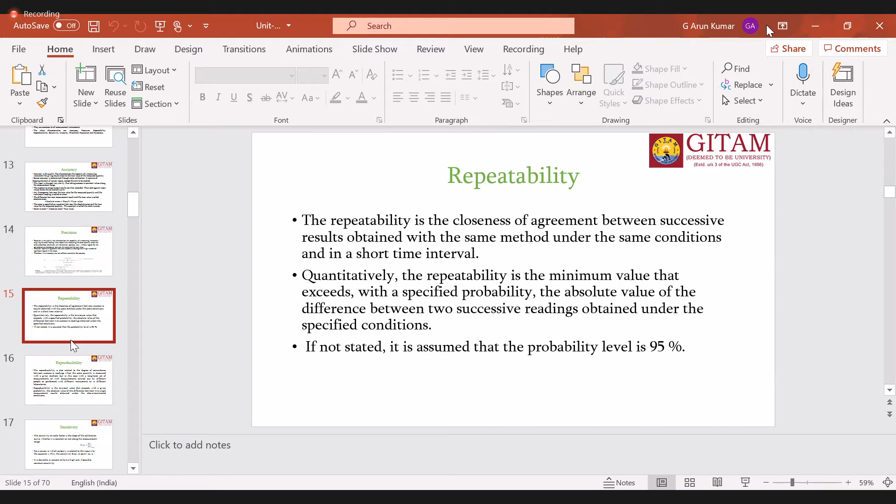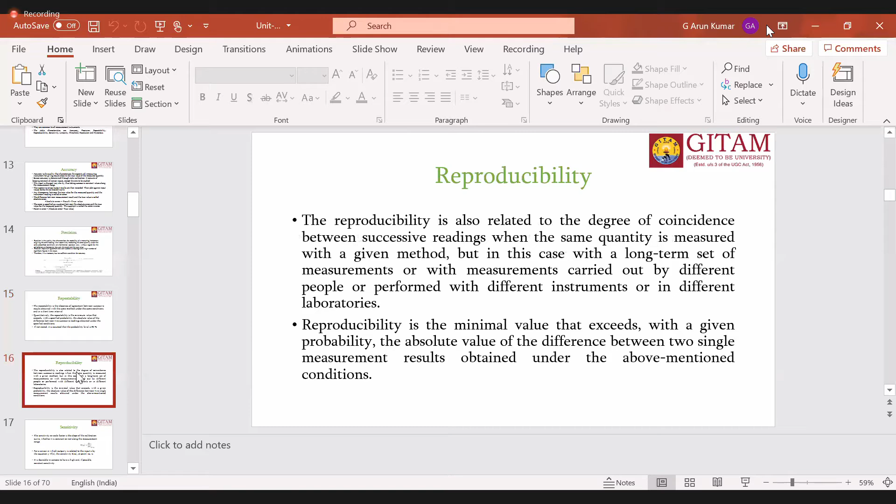Repeatability and reproducibility are similar, but repeatability is the ability of the system to produce the same value in the same continuous time periods. Reproducibility is the ability of the system to produce the same value for the same conditions and the same parameter at different time periods.

Sensitivity: ability of the system to give a response for the variation of the physical parameter. It is the speediness of the response in the measurement system.

Linearity describes the closeness between the calibration curve and a specified straight line. The dotted line represents the expected value, the expected response of the measurement system, while the dark line is the practical response curve.

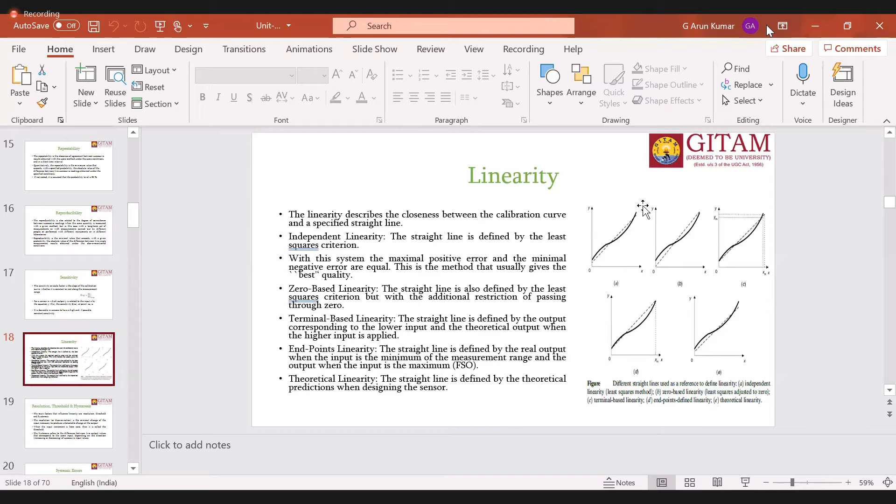Resolution and threshold are interlinked. Resolution is the minimum value that can be measured or detected by the measurement system. Threshold is the maximum value which cannot be detected by the device, which is less than the resolution.

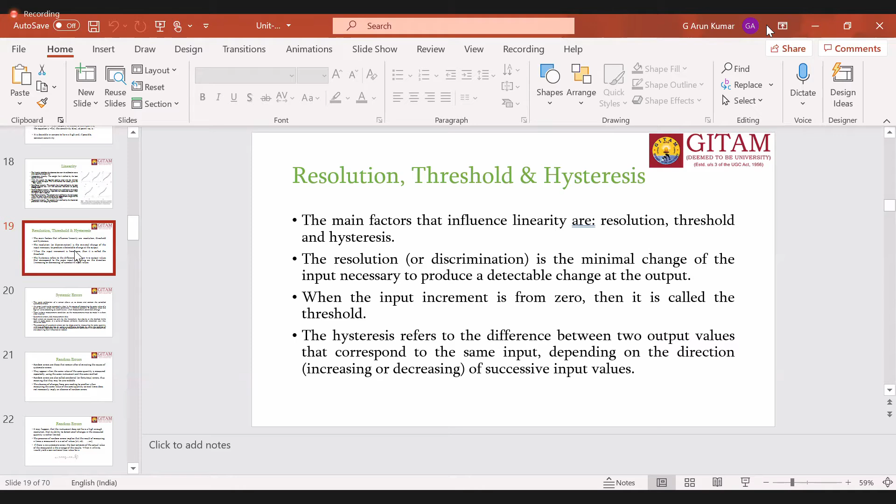Systematic errors can be detected and then rectified. But in random errors, we cannot detect the exact reason for the errors. We can eliminate the impact of random errors in our measurement calculations by taking average values and by using standard deviations.

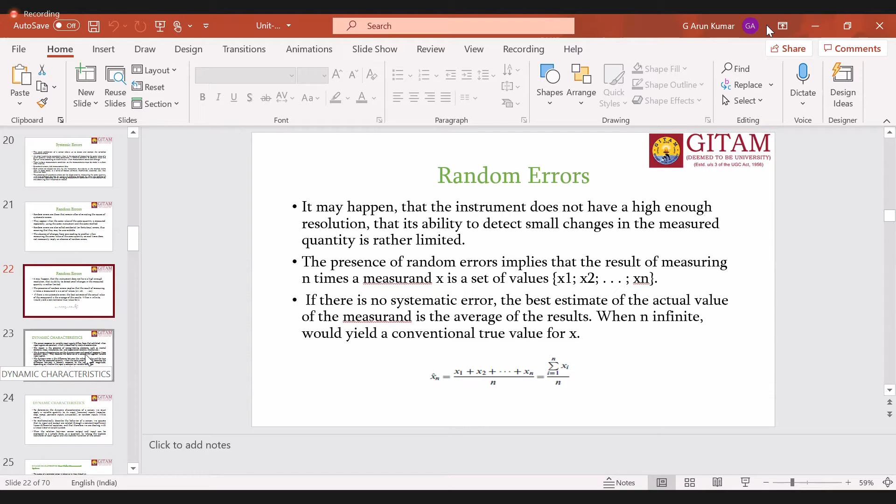Dynamic characteristics: we have taken three types of systems - zero order system, first order system, and second order system. And we have standard input signals like step signal, ramp signal, and sinusoidal signal. After applying those signals, we analyzed the first order, zero order, and second order systems.

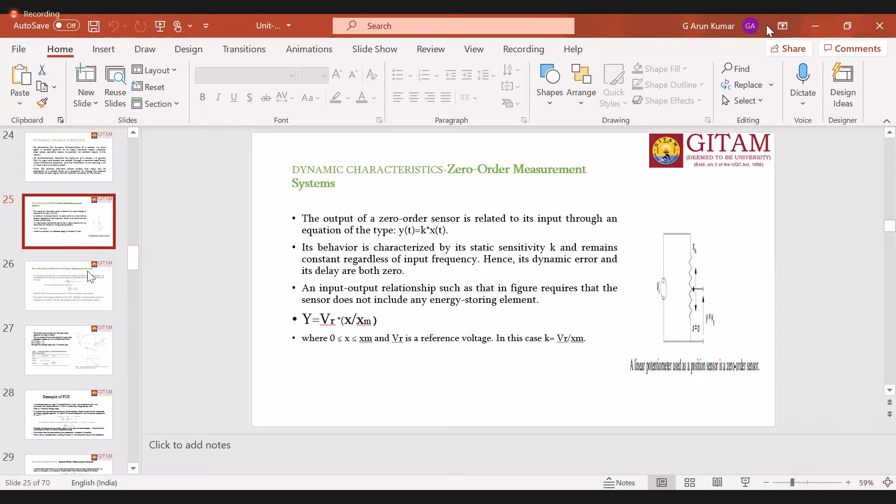In a zero order system, we do not have any energy storage devices, but in a first order system we have one energy storage device and one dissipating device. In a second order system, we have two energy storage devices and one energy dissipating device. In second order systems, the damping ratio is the main factor to get a response.

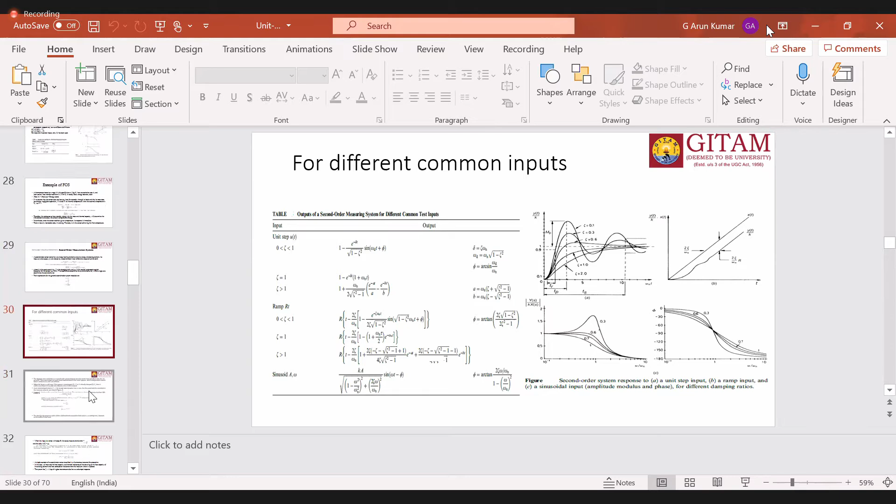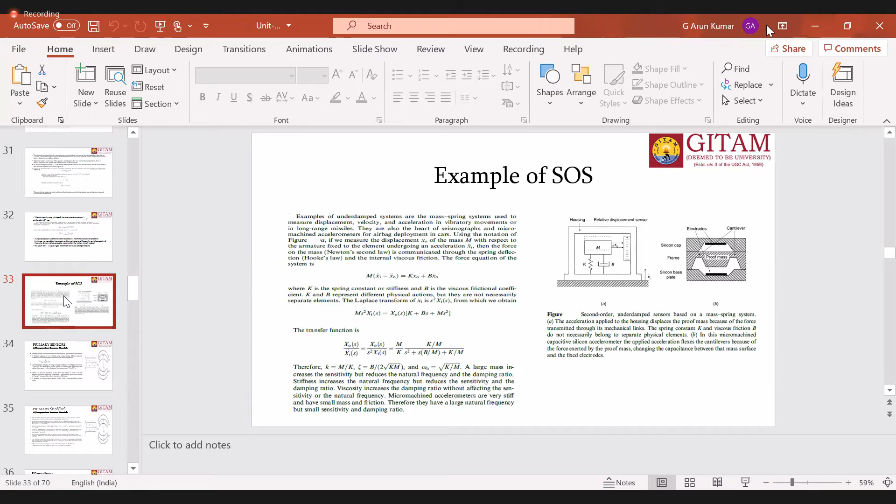We have seen practical examples for first order and second order systems, and discussed sensors. The bimetal sensor is a device to sense temperature, formed by two different metals welded together, which have two different temperature expansion coefficients.

Next we focused on pressure sensors: Bourdon tube, U-tube manometer, diaphragm, and capsules and bellows.

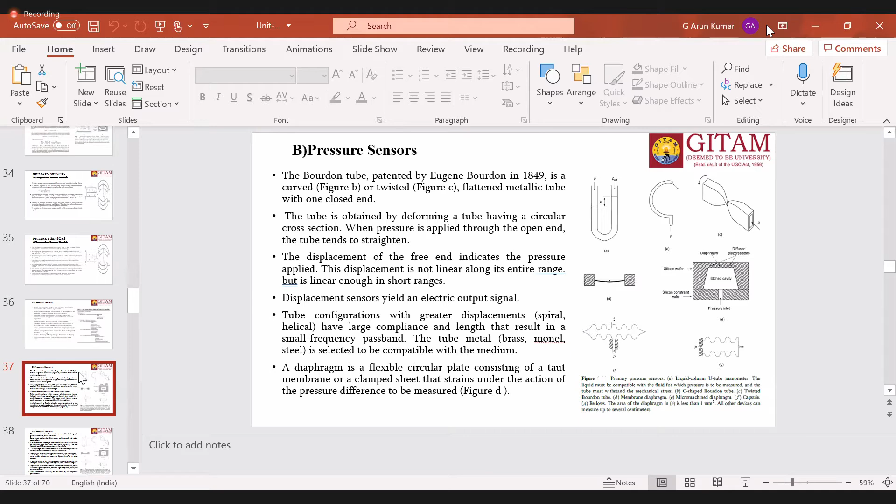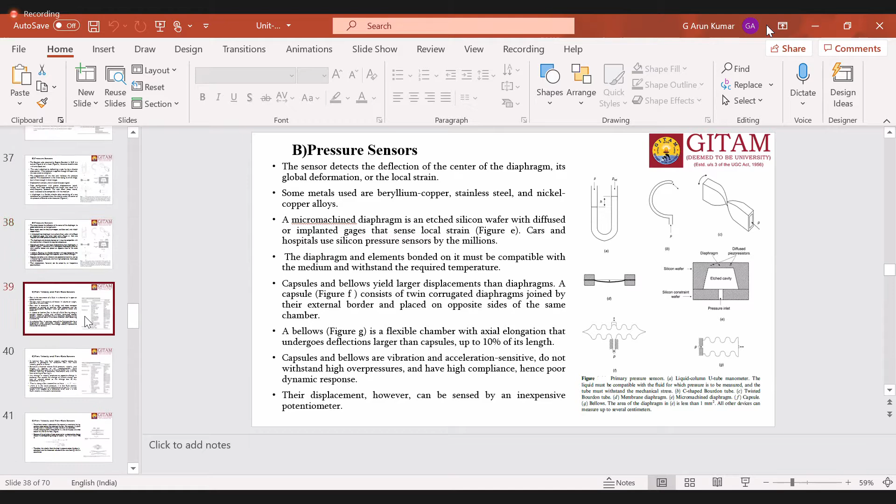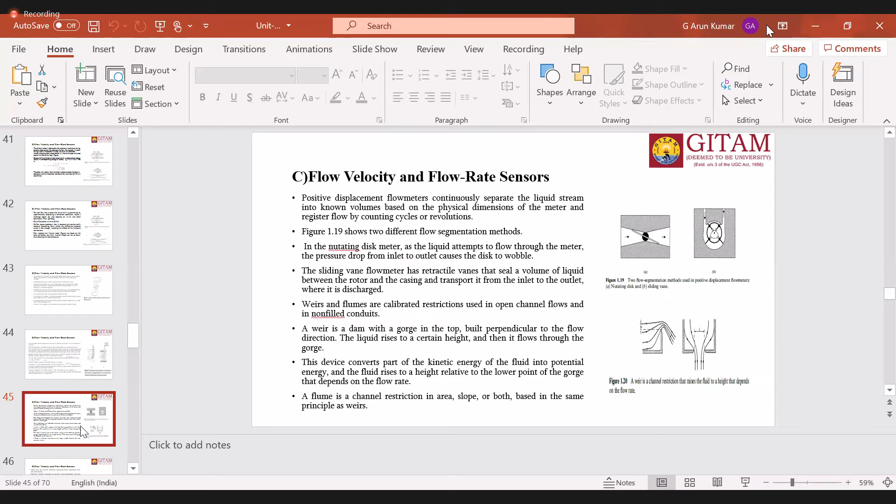We have focused on flow meters. These are the basic flow meters: venturi meter, orifice plate, flow nozzle, rotameter, pitot tube. And these are the massive flow meters: nutating disc, sliding vane, and weir channel.

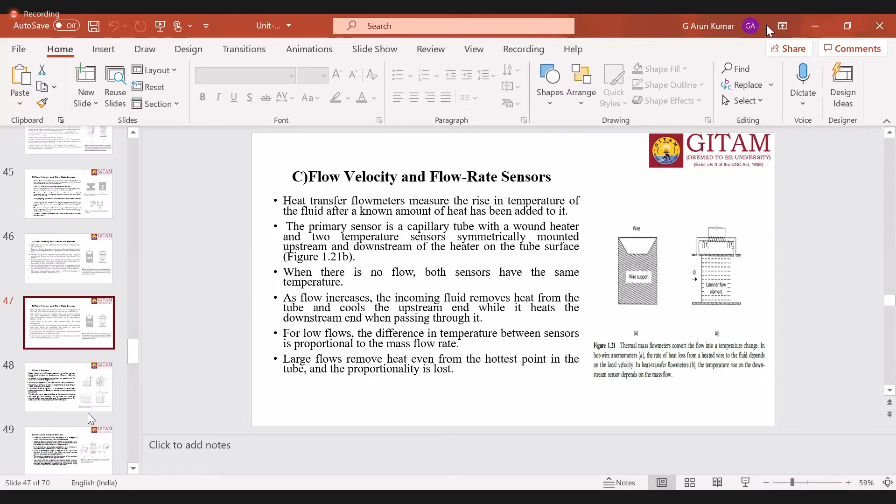We can use a hot wire anemometer also to estimate the flow rate. And next we focused on level sensors.

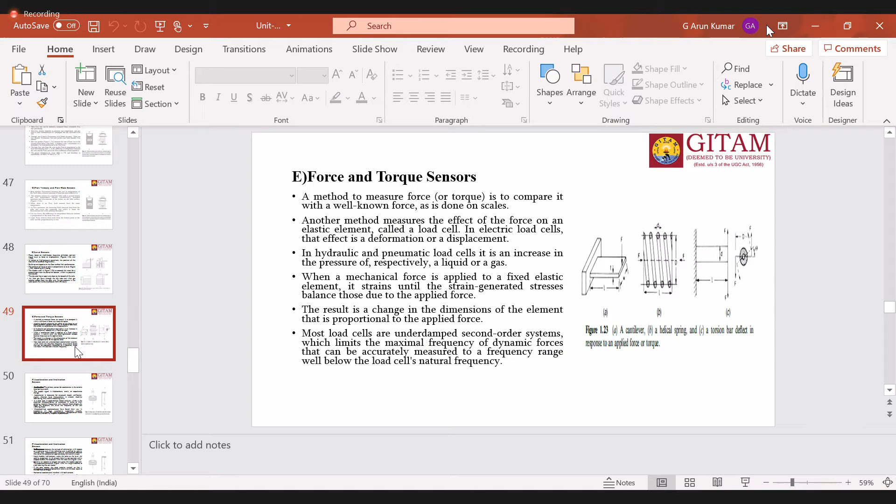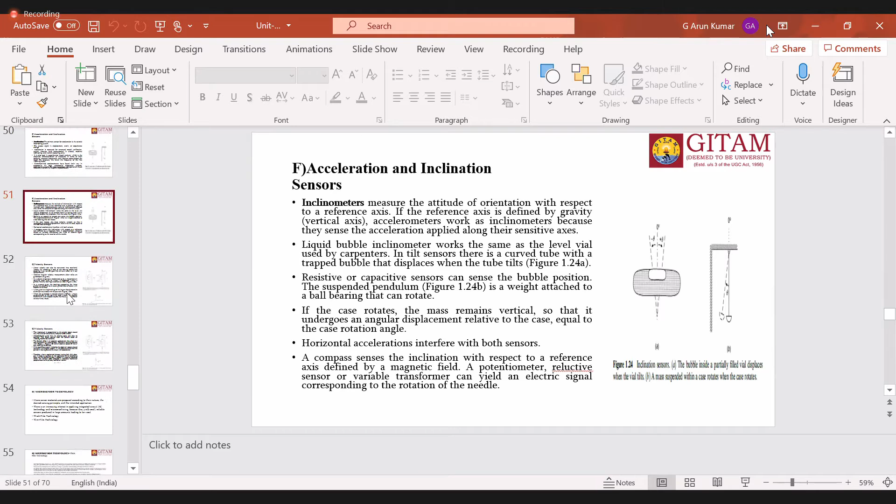To estimate force and torque, we have the cantilever beam, helical spring, and torsion bar. The torsion bar is for torque and the remaining two are for force. Acceleration and inclination sensors: the gyroscope is also used for inclination and acceleration sensing.

After that, we focused on MEMS and micro sensor technology also.

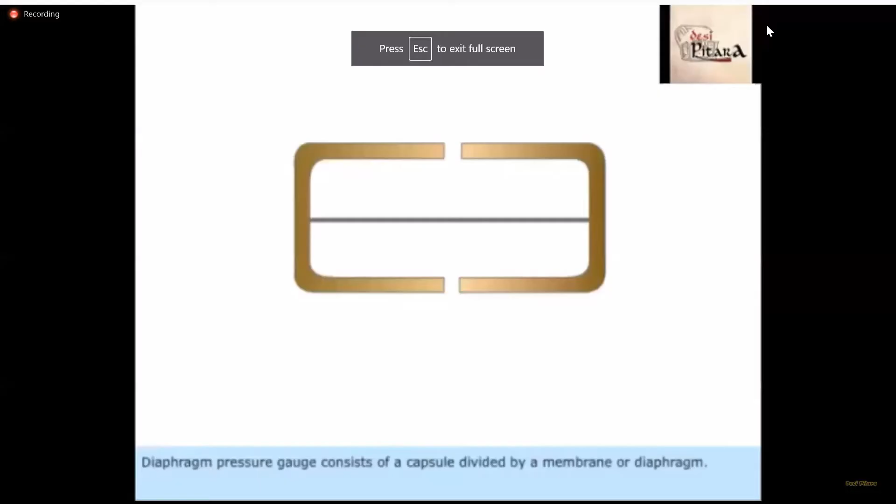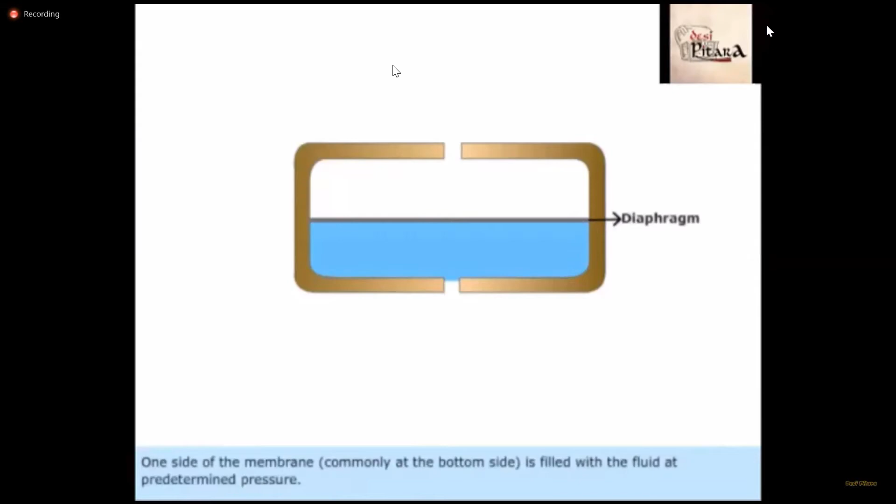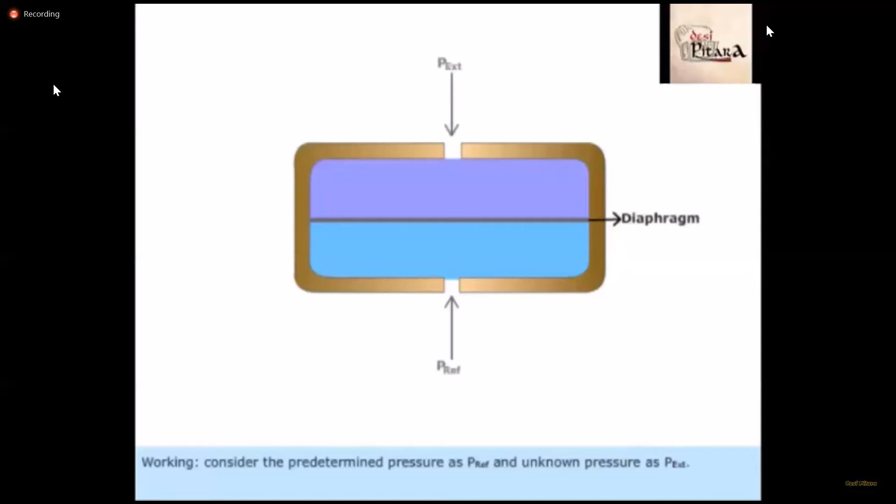We are going to learn about the membrane, which commonly at the bottom side is filled with fluid at predetermined pressure, and the other side is filled with the fluid or gas whose pressure is to be determined. Working: consider the predetermined pressure as P-REF and unknown pressure as P-EXT. The pressure difference, P equals P-EXT minus P-REF, gives mechanical deflection to the diaphragm.

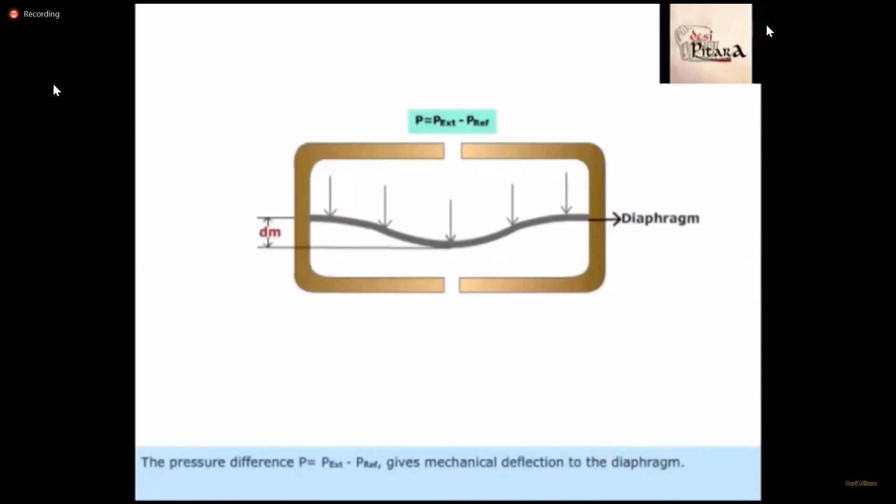Here, students, you can see it is an elastic type of material we are using as the diaphragm. Membrane deflection is proportional to the pressure applied. By measuring this membrane deflection, the unknown pressure can be calculated.

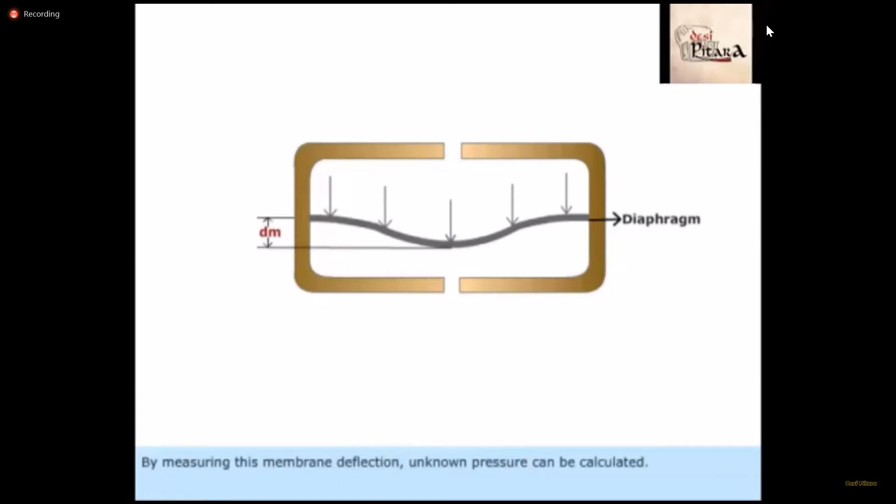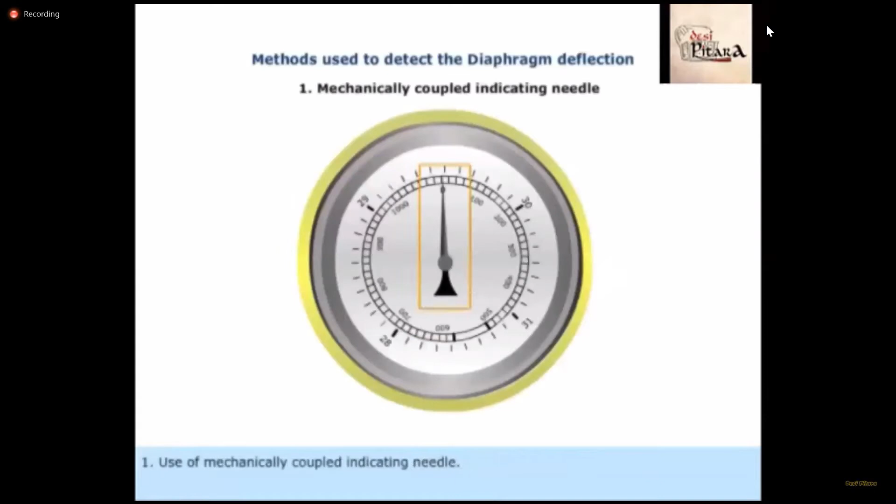There are a number of ways to measure this deflection: one, use of a mechanically coupled indicating needle; two, use of LVDT, the linear variable differential transducer.

When LVDT is used to find membrane deflection, the diaphragm is connected to the core of the LVDT. Students, LVDT is an electrical device, so here we have two windings.

If this core is at the middle, we will get zero output. If the core is near E2, we will get negative voltage. And if the core is near E1, we will get positive voltage. This is how the LVDT is designed - by observing the output, we can estimate the core position.

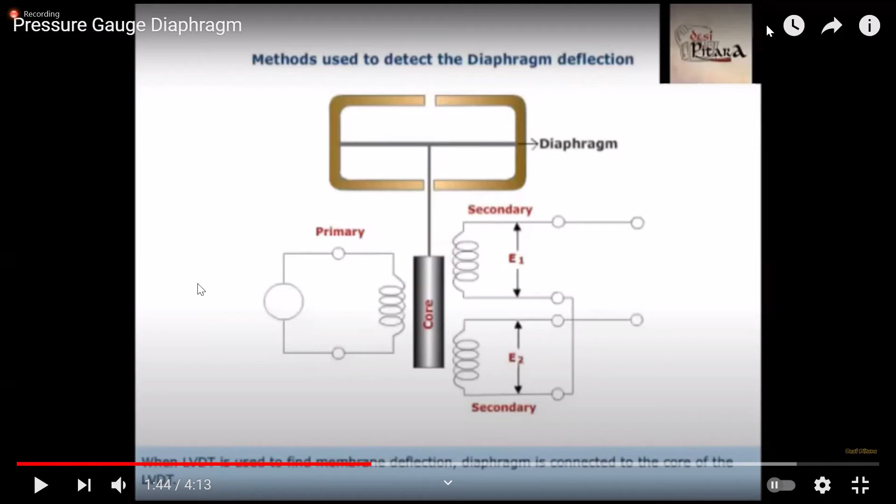As you know, in LVDT, there are two secondary coils connected in series opposition, and thus induced EMFs in those coils oppose each other. So the resultant EMF is zero at normal condition.

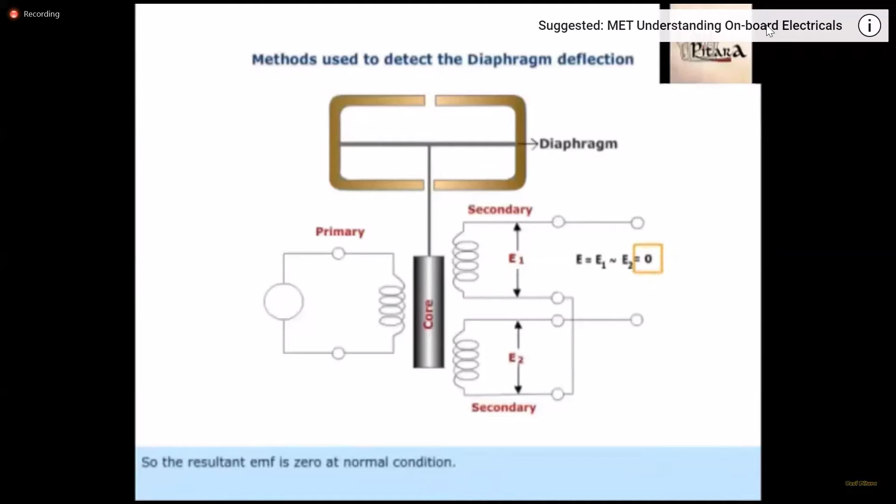When the core moves due to membrane deflection, the flux linking with one of the two secondary coils increases, which increases induced EMF in that coil. So there exists some resultant EMF. From that, we can determine deflection and thus pressure can be calculated.

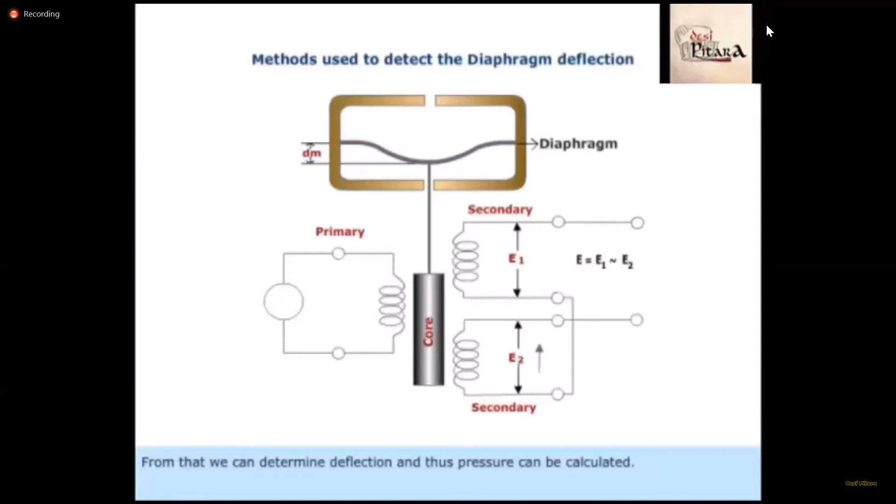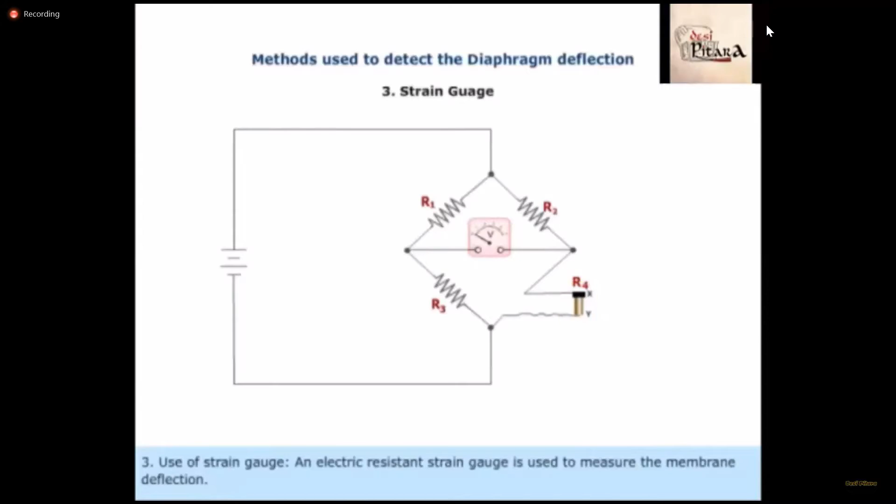3. Use of strain gauge. An electric resistance strain gauge is used to measure the membrane deflection. It has one long resistor strip XY connected to the diaphragm. At that point, X is fixed and Y is movable.

As the diaphragm bends, it stretches out the resistor from XY to XY dash. This stretching causes reduction of area of cross-section of the strip and increases its length. Hence, the resistance value of the strip increases. Refer formula R equals rho L divided by A.

The increase in resistance causes unbalance in the bridge, which shows indication in the voltmeter. By measuring this voltage value, gauge can calculate the amount of deflection or bend in the diaphragm. Using this displacement, unknown pressure can be determined.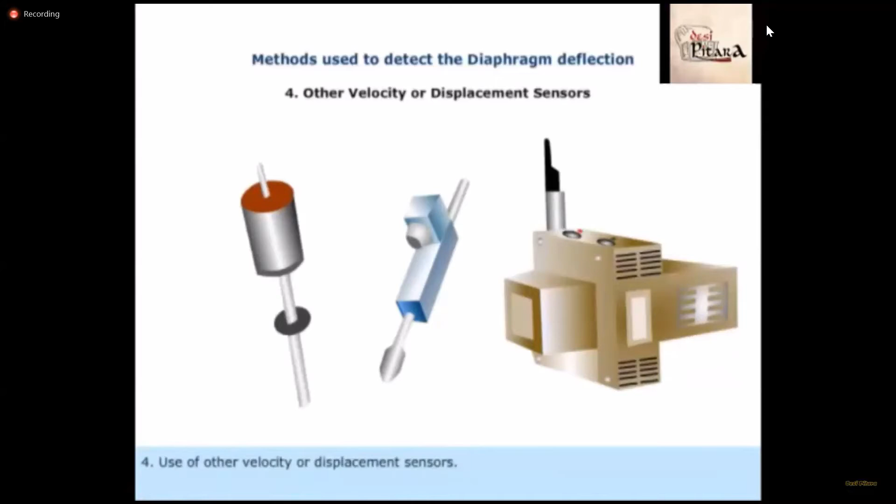4. Use of other velocity or displacement sensors. Thus, you have learned about diaphragm pressure gauge.

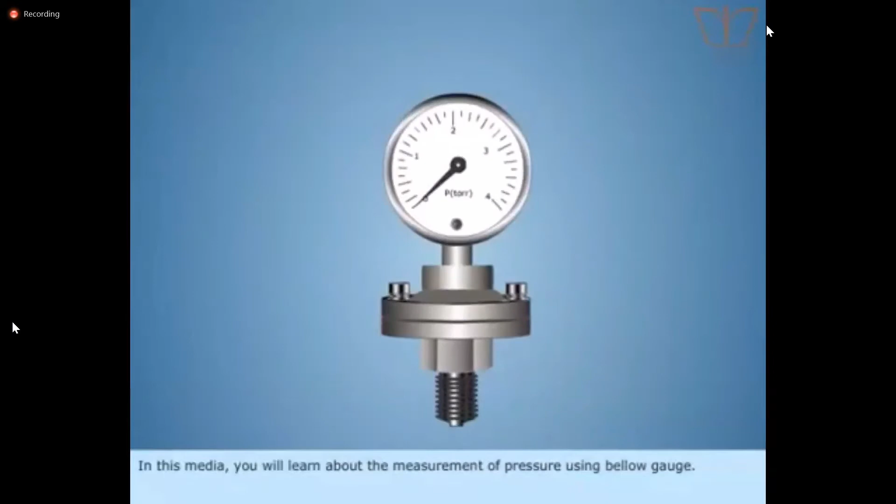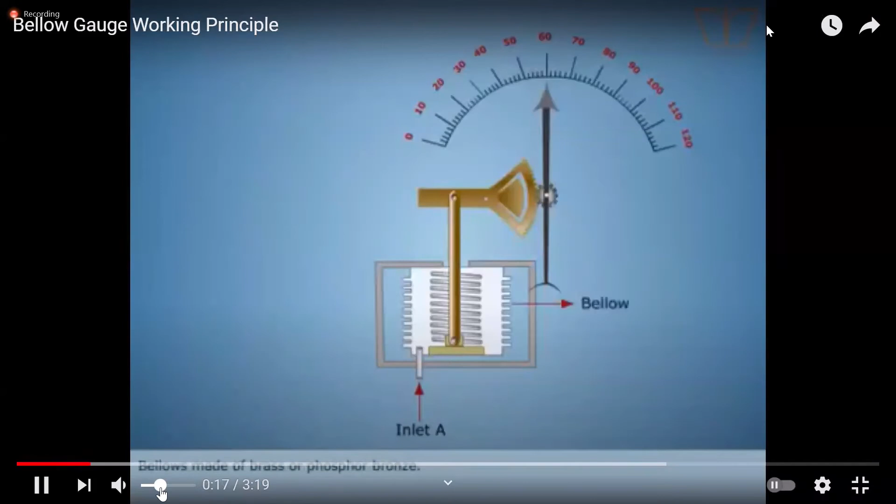The device consists of the following parts: Inlet A, where the unknown pressure is applied. Bellows made of brass or phosphor bronze. Spring arrangement. Connecting link. Sector and gear arrangement. Pointer needle. Graduated scale calibrated in terms of pressure. Outer case.

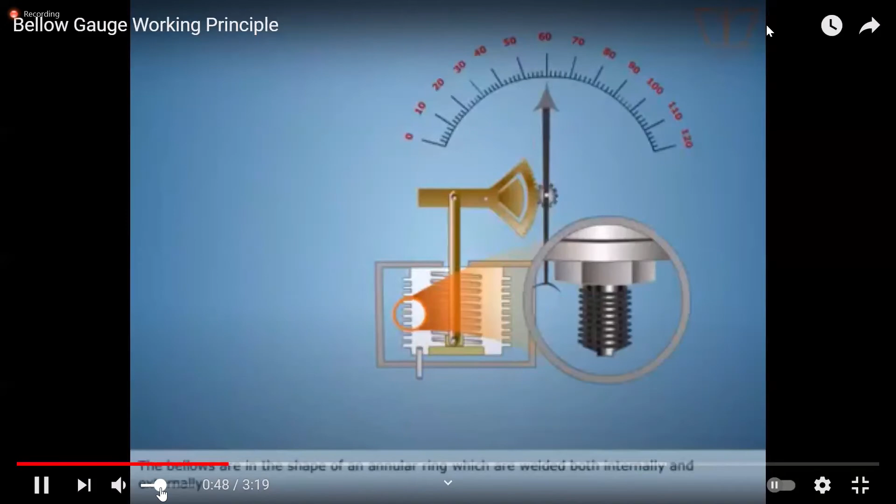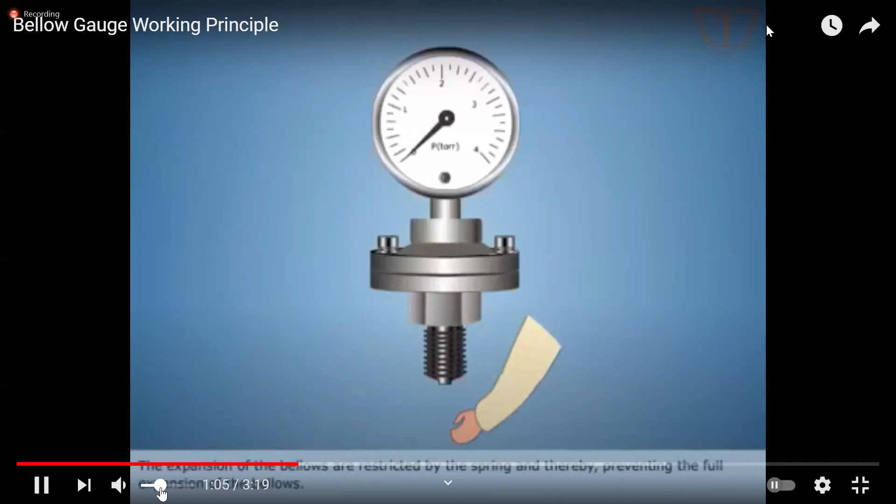The bellows are in the shape of an annular ring which are welded both internally and externally. The bellows contract or expand axially depending on the incoming pressures. The expansion of the bellows is restricted by the spring, thereby preventing the full expansion of the bellows. This mechanism will extend the life of the bellows and protects it. Bellow openings should be hermetically sealed such that there is no leakage of pressure.

Let us see the operating principle of the bellow gauge. The unknown pressure to be measured is applied at the inlet A. When the applied pressure is low or high, the bellows will squeeze or expand.

This moves the link up or down, which is connected to the sector arrangement. The sector arrangement will now react to the movement of the link and the pointer moves over the graduated scale. The readings on the graduated scale indicate the pressure value. When the pressure is removed from the case, then the link should come back to its original position.

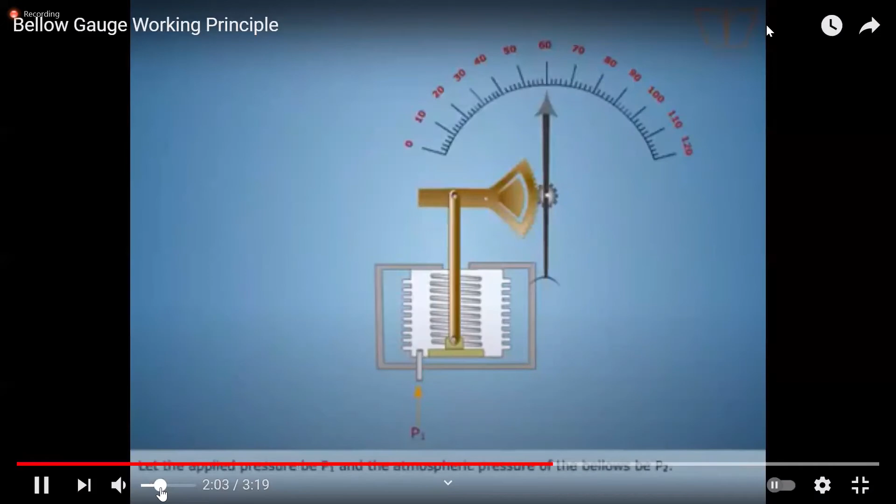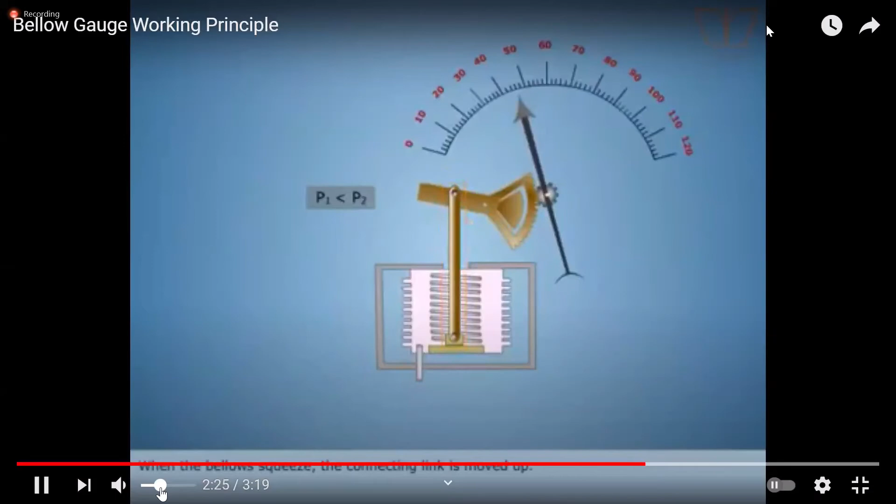Let the applied pressure be P1 and the atmospheric pressure of the bellows be P2. Case 1: When P1 is less than P2, the bellows will squeeze or contract. When the bellows squeeze, the connecting link is moved up. This pushes the sector down and the pointer moves over the graduated scale.

Case 2: When P1 is greater than P2, the bellows try to expand. When the bellows are expanded, the connecting link is moved down. This pushes the sector arrangement up and the pointer moves over the graduated scale.

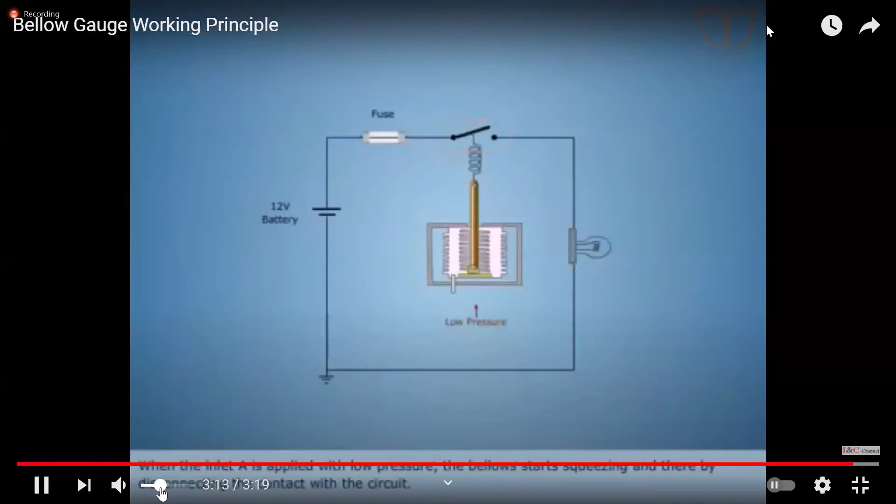Bellow gauge can also be used as an electrical switch. Bellow gauge is connected to any electrical circuit. When inlet A is applied with low pressure, the bellows start squeezing, thereby disconnecting the contact with the circuit. Thus, you have learnt about the bellow gauge.

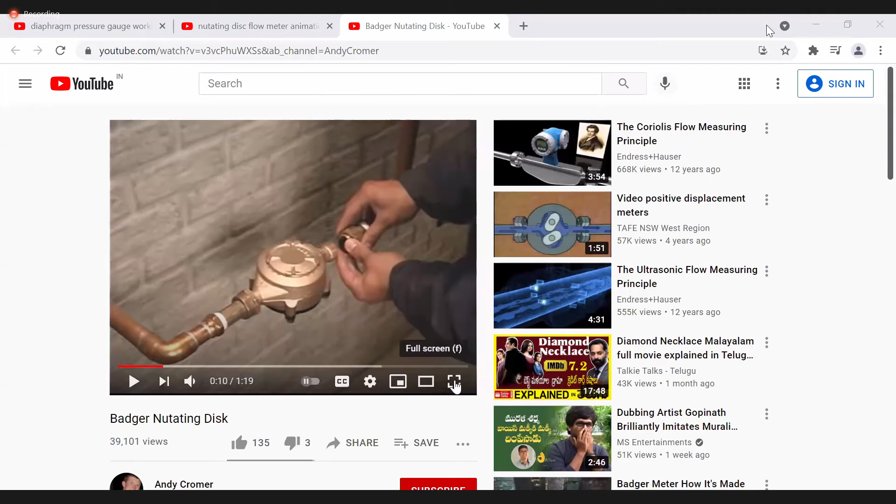Students, in this animation, we will understand the working of the nutating disk flow meter. Water flows directly into the meter housing. The water first flows through the meter's internal strainer before it enters the measuring chamber. The strainer protects the measuring chamber from damage due to debris in the water.

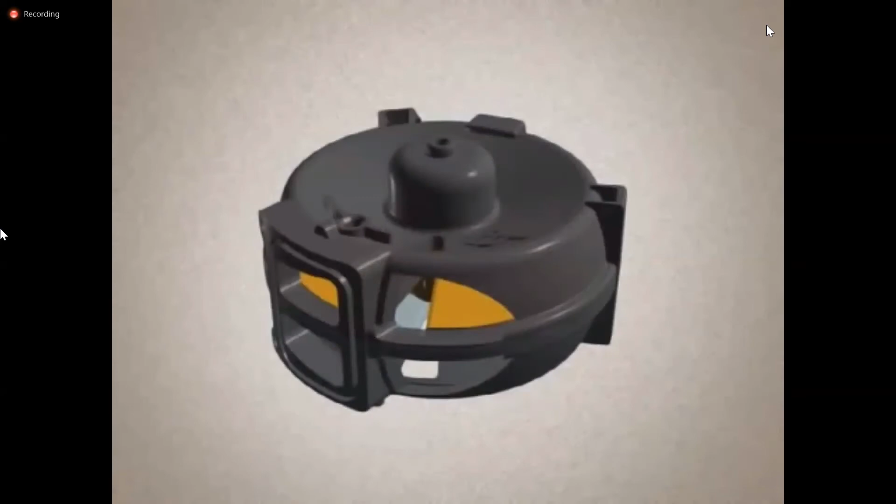Inside the chamber assembly is a movable disc that's located on a spherical ball guided by a thrust roller. As the water flows into the measuring chamber, it causes the disc to nutate, a motion similar to a coin dropped on a table. Notice that the disc does not rotate, but rather wobbles on its axis. Therefore, the space formed between the disc and the chamber wall has a constant volume as it moves around the chamber. The water in the chamber is a fixed volume, or displacement. That's why a disc meter is called a positive displacement meter.

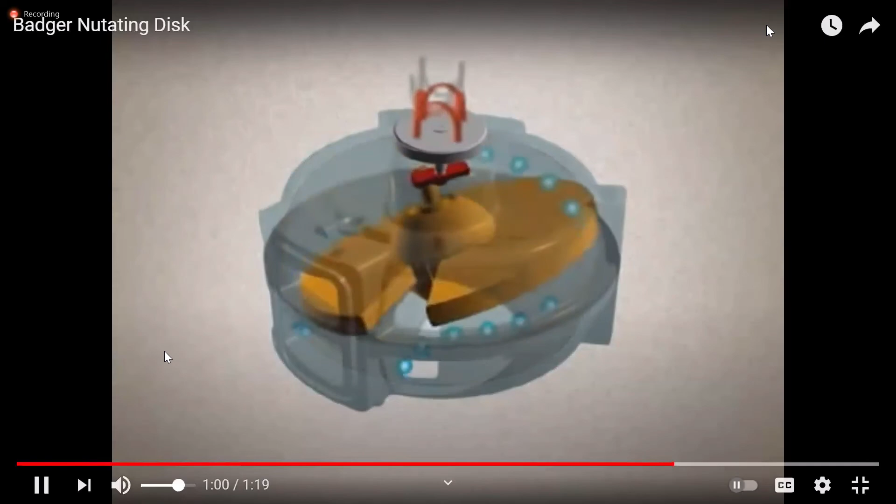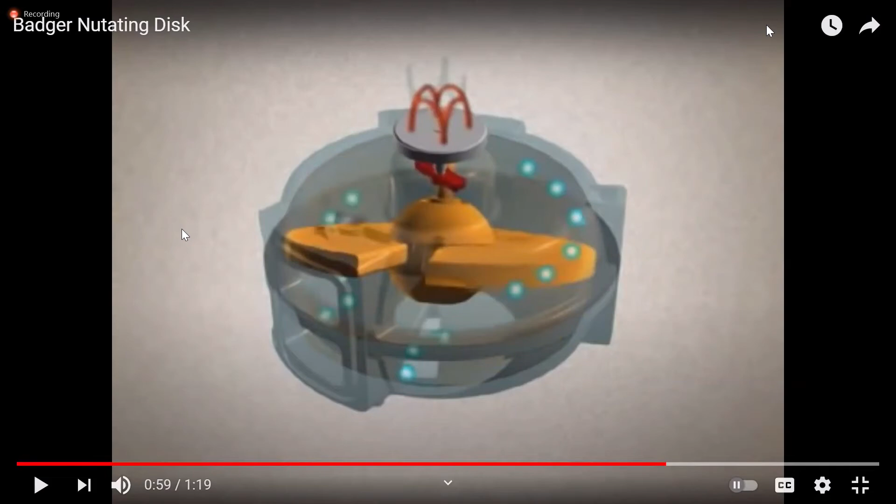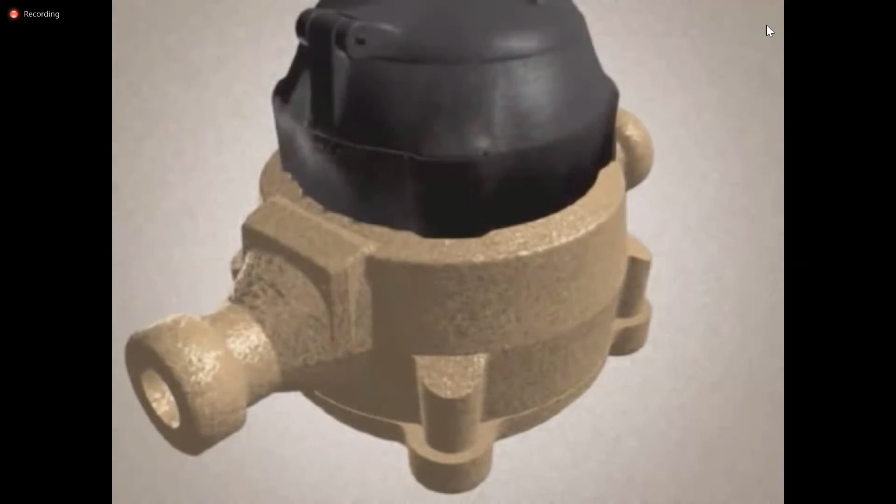The smooth motion of the disc also eliminates the annoying noise produced by some other types of positive displacement meters. As this happens, the nutating disc translates its movement through a magnetic coupling to the register. The water then leaves through the outlet port of the chamber assembly.

Students, we have discussed other positive displacement meter, that is sliding vane. Now we can see that animation.

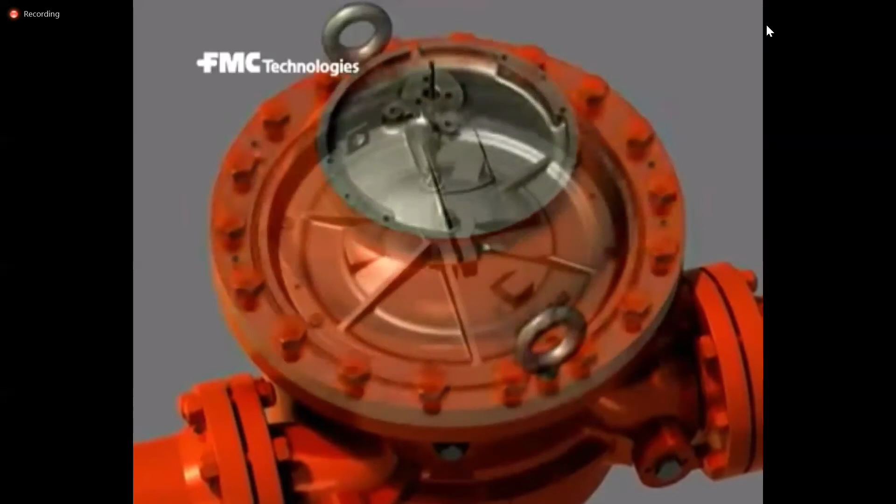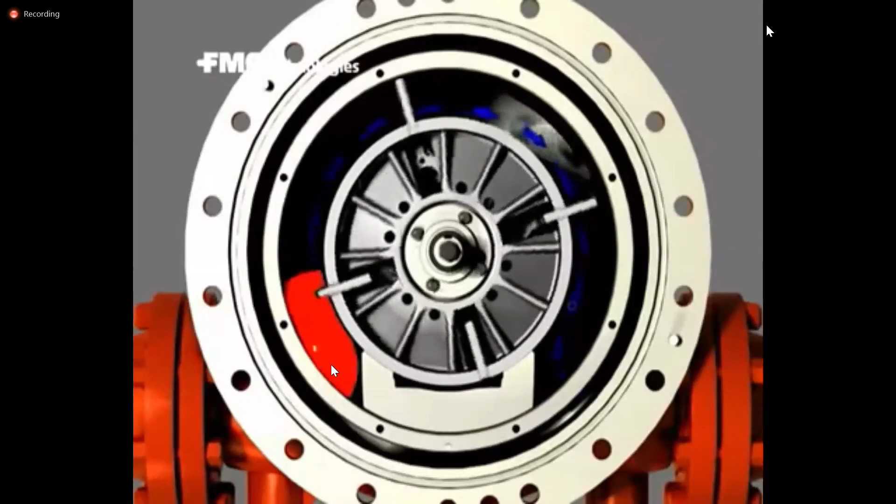The fluid flow enters the meter on the left side. The block at the bottom of the meter separates. See here, this is the inlet and we are allowing fluid. That fluid is rotating the disc. The inlet is separated from the outlet, and here we have the outlet. It will rotate the disc and it will come out from the pipe. This prevents the fluid from bypassing the measuring chamber. Instead, it is channeled around the rotor into the measurement section.

The fluid is continually separated into discrete segments in the measurement section. The path of a single fluid segment is highlighted in red. As the measured fluid segment is discharged from the meter on the right, the rotor cover is removed, and we see the blades rotating around the shaft. The blades are extended and retracted as the blade rollers follow the profile of the stationary cam.

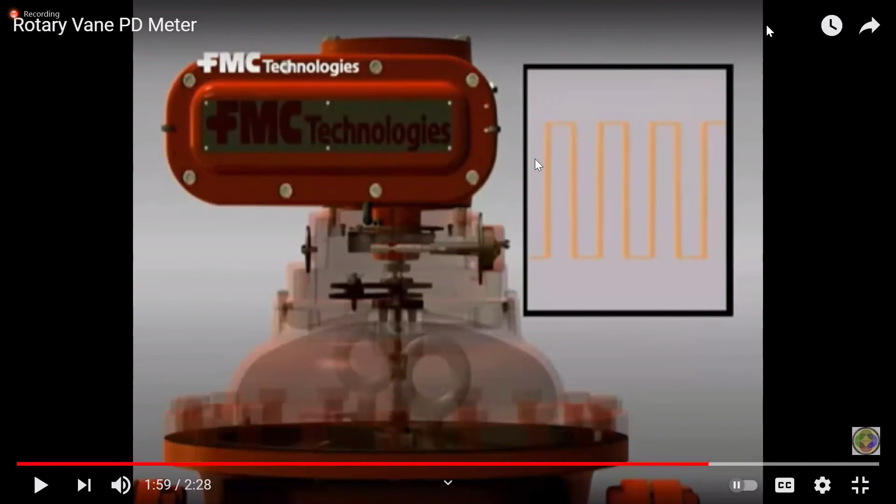The fluid flow drives the rotation of the rotor and blade assembly in a continuous sequence. The rotor assembly is connected to the meter output shaft by a gear coupling. Each revolution of the output shaft, therefore, represents a precise volume that has passed through the meter. The external gear train changes the metered volume into the preferred measurement unit, such as gallons, barrels, or liters. The output shaft can be directly coupled to a mechanical calibrator and counter. And these are the rotations of the disc.

Another important flow meter, students, hot wire anemometer.

This video will discuss the working of hot wire anemometer. First we see, students, in this pipe we have arranged a hot wire. This red color is hot wire, and this is connected to an electrical circuit.

This circuit is called a bridge. Here the principle is the 4 resistors should have the same value. Then output will be 0. If any one of the resistors has a different resistance value, we will get an output. By observing that output, we can estimate the variation of the resistance in this hot wire.

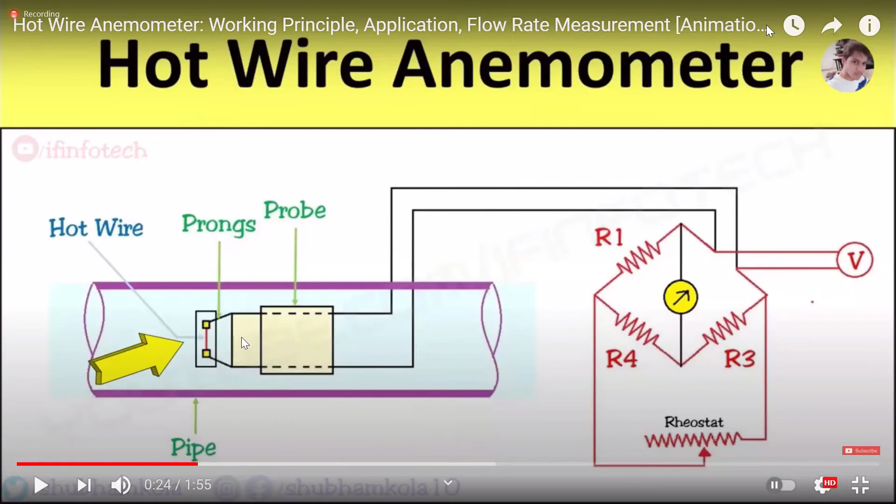Here, before allowing the flow, this hot wire has some resistance, which is equal to these 3. When you allow the liquid, because of that liquid flow, the hot wire will lose its temperature. And we have to keep on maintaining that resistance by giving the temperature. Here is the working principle: when fluid flows over a heated surface, heat is transferred from the surface. Depending on the flow rate, the hot wire will lose its temperature. So this is the construction of hot wire anemometer.

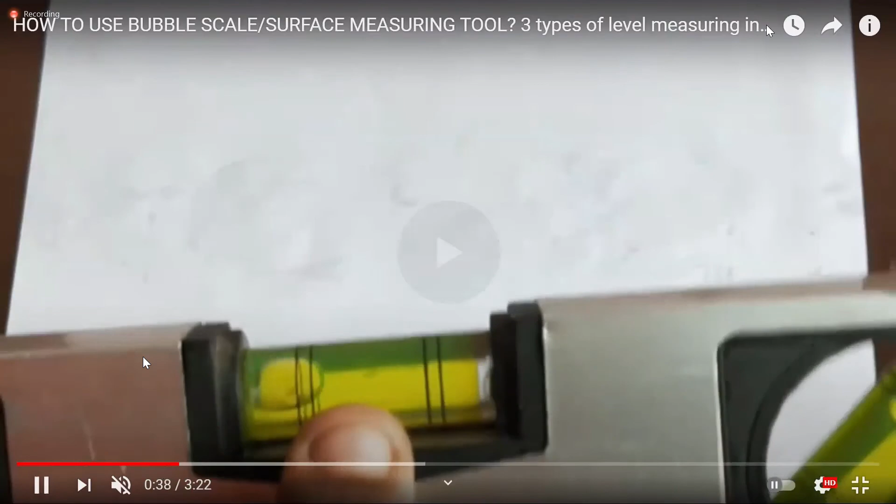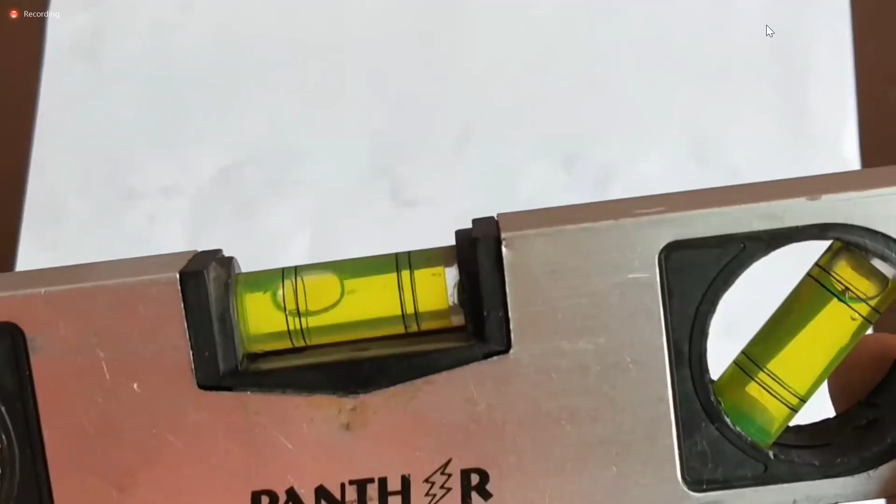See students, if we change the position of the scale, the bubble will take different positions. Here you can clearly observe. The bubble will take different positions in that small cube. So here they have arranged 3 small cubes with the bubble.

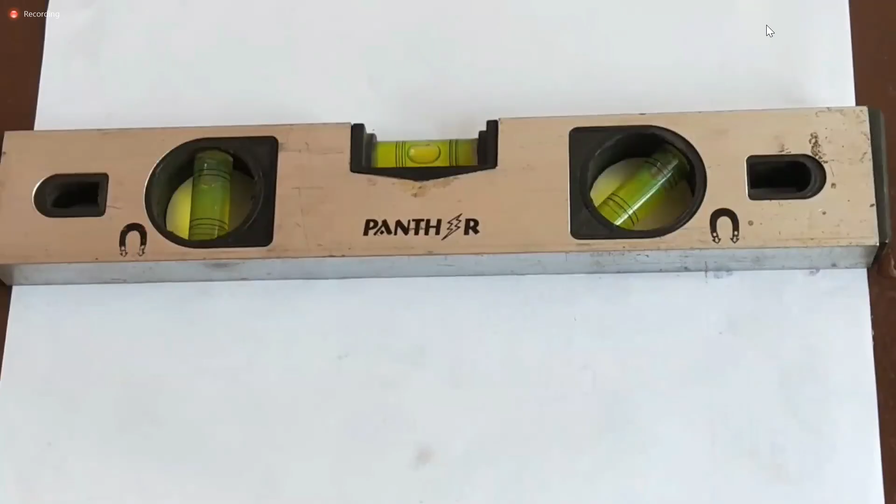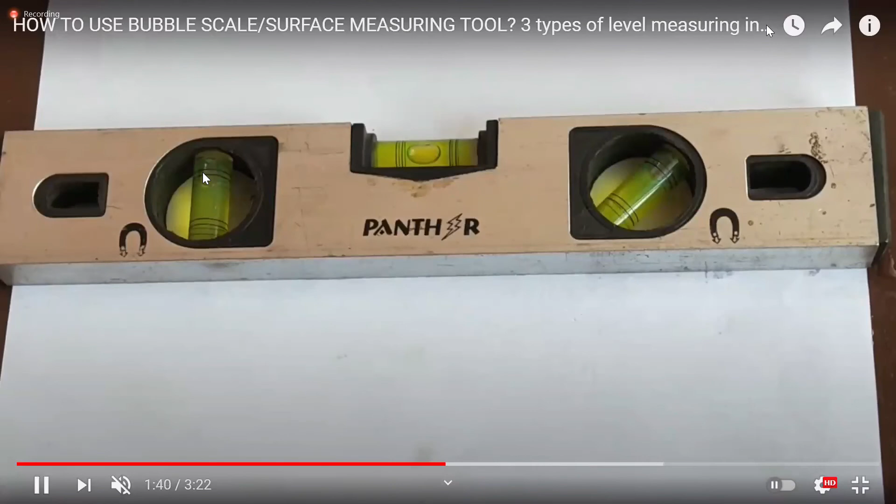So if the surface is flat, they will take standard positions like that. The middle one will be in the middle, and here at the top, and this is also at the top. The surface is flat. Its base is flat.

So now, in this position, that scale and that iron piece are making a 90 degree angle.

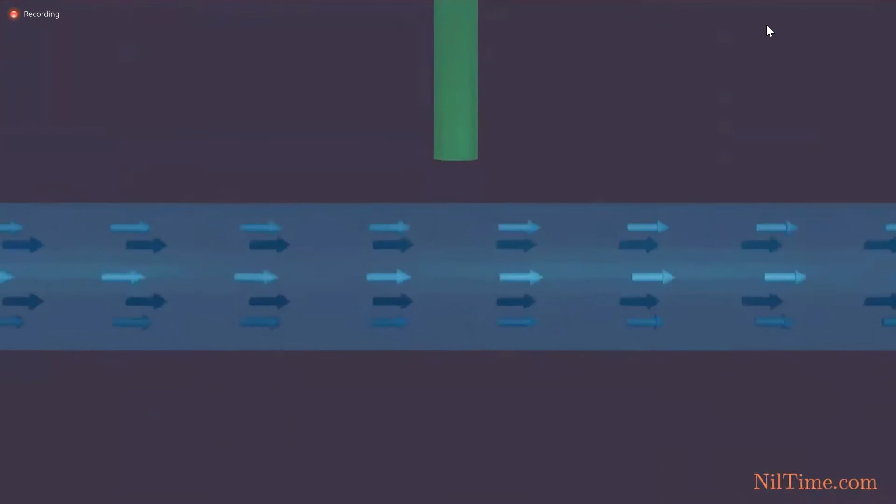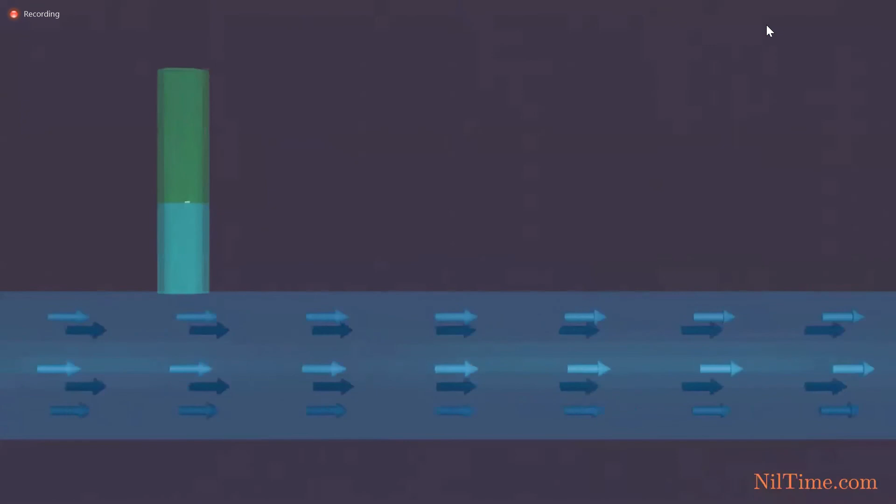Consider a piezometer tube. The piezometer tube is just used to calculate the static pressure, by measuring the height to which a column of liquid rises against gravity. The fluid is static, relative to the moving fluid. Hence, it is normally termed the static pressure. The pressure height would be the same, considering the flow is steady and incompressible.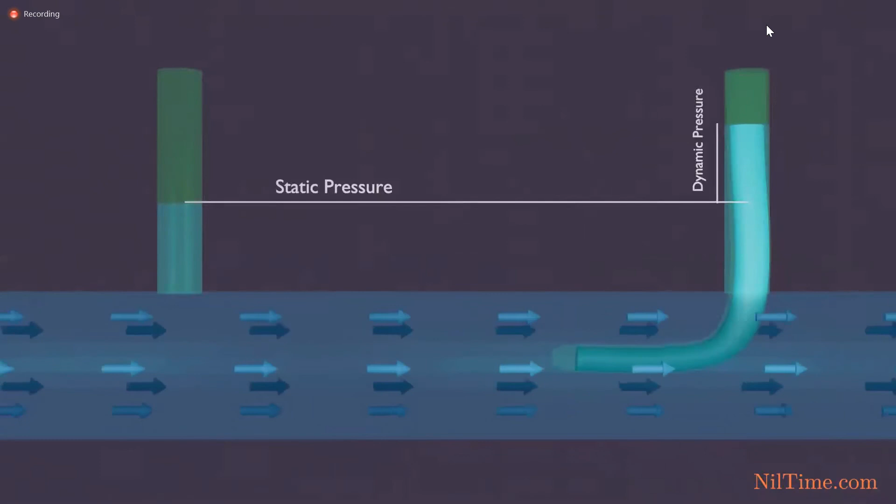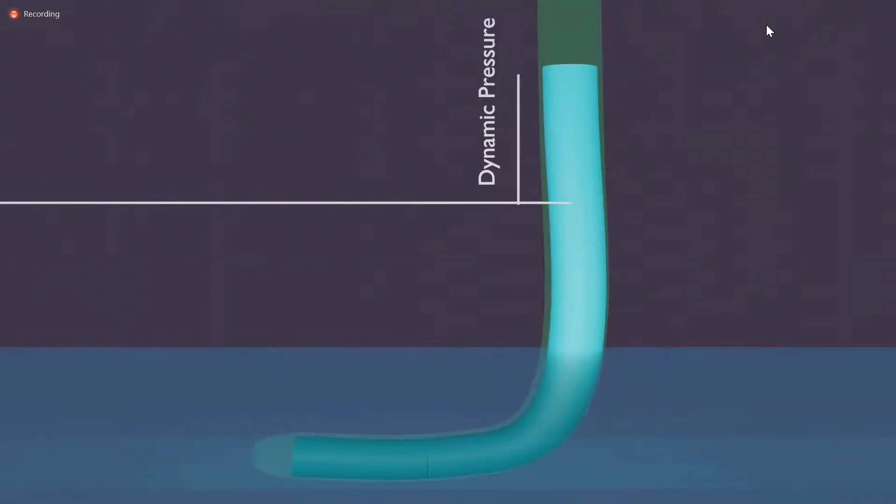But what if we replace it with a pitot tube? The column height of the water will increase. This extra height is called the dynamic pressure, caused due to stagnation pressure. When the water particle enters the pitot tube, its velocity will convert to dynamic pressure. Stagnation pressure is the total sum of static and dynamic pressure. So the stagnation pressure represents the pressure at a point where the fluid is brought to a complete stop.

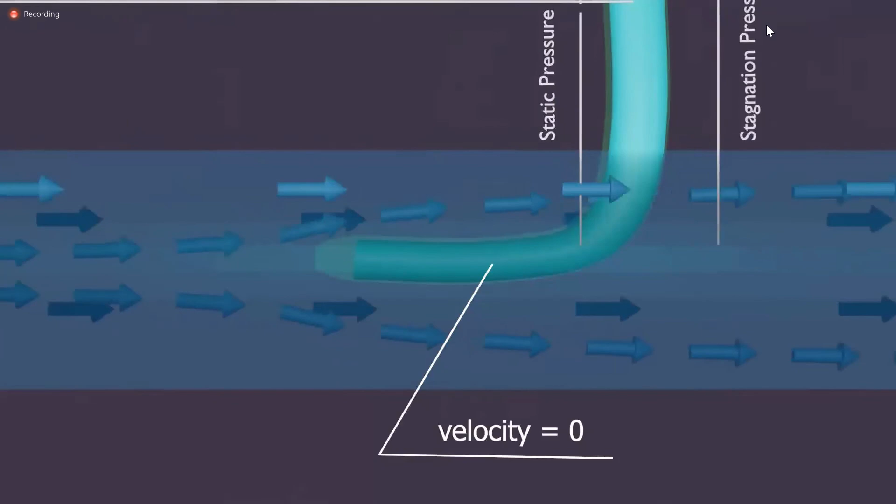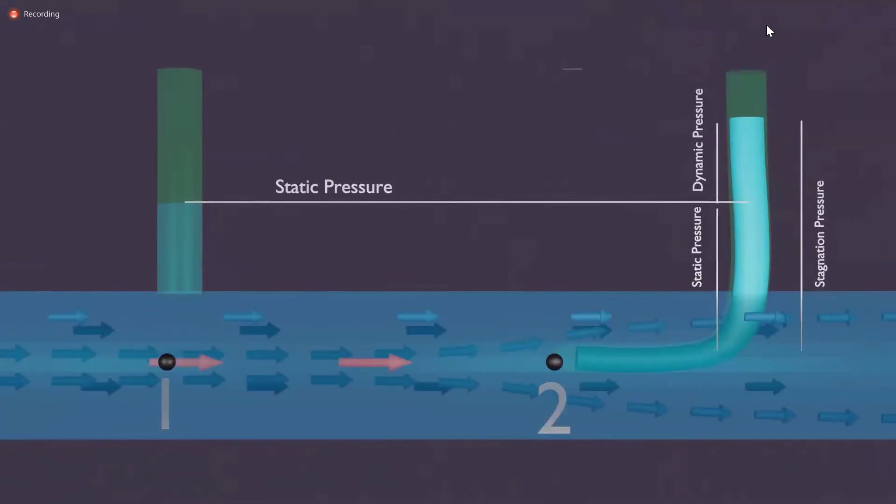Now let us apply the Bernoulli equation and derive the formula for stagnation pressure. For that, let us write point 1 and point 2. Velocity at point 1 is the velocity of flowing water v, whereas the velocity of water at the head of the pitot tube, that is point 2, is 0. The datum height z1 and z2 is 0. Now solving the equation with those values we get...

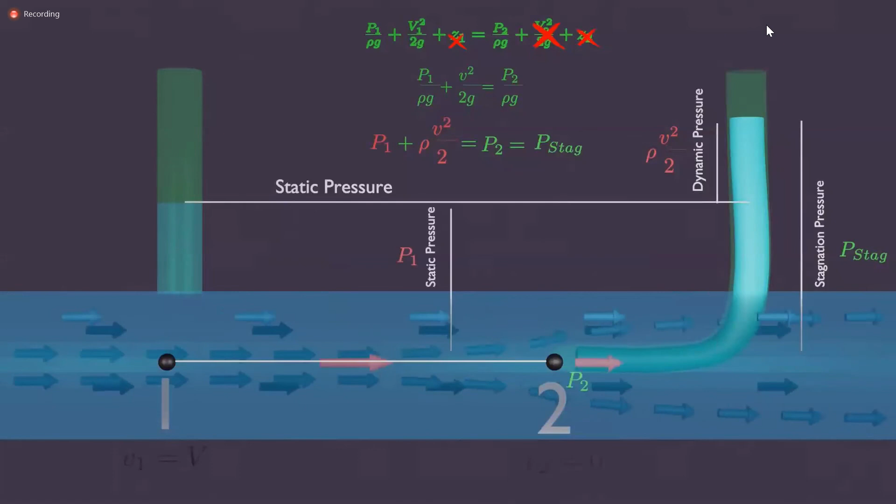So these are the different flow meters, students, and different pressure sensors which we have discussed in our subject. And in the first module or in semester examinations, you will get questions on these topics.